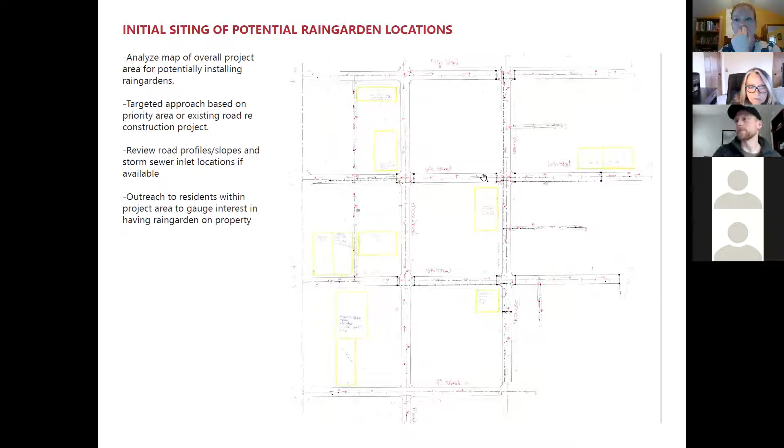Then we take a similar area, looking at contour information as well, on the broad scale, just to get an idea of the land patterns and where the current drainage is. Because if there's collection areas that already exist, that's going to be our best opportunity to start looking at implementing projects to capture and treat stormwater runoff.

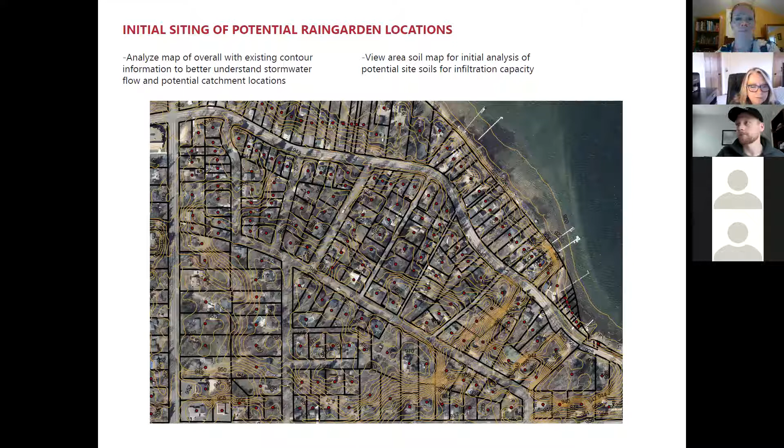This also applies on a smaller scale, down to an individual property. This is just an example of a church property that we were looking at in Roseville, and we go through the same process, but on a property scale.

We look at this map, looking at the different surfaces, whether that's parking lot, roofs, lawn, and get an idea just from a desktop analysis. We start to get an idea quickly on where potential things could be implemented, like a rain garden to capture roof runoff, or somewhere we can grab runoff from the parking lot before it gets to the storm sewer.

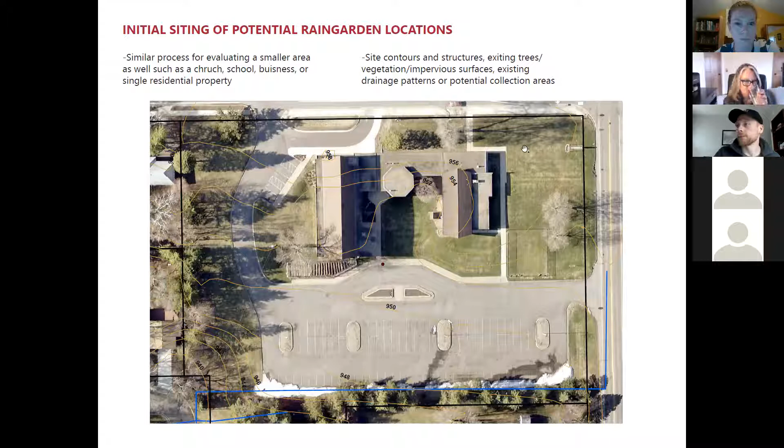Then we take those ideas and set up site visits with the landowners to do an on-site verification of what we analyzed from just aerial imagery.

One step in this is looking at utilities, so calling in a utility locate is obviously important before anyone starts digging a rain garden. Then on site, we look at things we saw, like roof drainage or storm sewer inlet locations that we had maps of, verifying those on site.

Like the picture on the top right, looking at this park area, you can see the catch basin in the corner of the parking lot for the storm sewer. All the water from the parking lot is already going there, so if we can implement something just upstream from that, that's probably a good place to pull water off and create a rain garden in the grassy area.

Similarly, if there are any areas, like the bottom left picture, a marshy area next to a driveway where the water runs off and collects, just looking at those opportunities on site, you can start to pick out these spots that are already conducive to potentially creating a project there.

So just looking at current runoff patterns, things like where the impervious surfaces are, downspout locations is a good thing to look at, where roof drainage is coming off of roofs. And then checking for any other potential conflicts or obstructions like trees, or the park had a picnic area there, so we need to make sure we leave room for that.

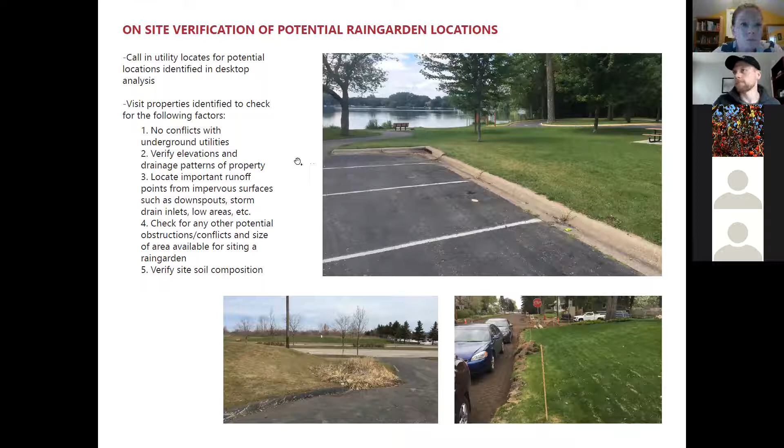From there, we've picked out some good spots on a property that might be good for rain gardens. Then we've got to start looking at the watershed and what all drains to that spot.

In this example, there's a rain garden down in the left-hand corner up by the street, looking to create a curb cut rain garden, as we call them, to treat runoff from the road and surrounding areas. So we pull out the different land uses and impervious surfaces versus lawns and trees, areas that have some permeability to them.

We use that data to create a watershed and calculate how much runoff would come to that rain garden, so we can properly size it. I usually use GIS software to do this, because it can easily map these out and calculate areas, so that works well. But particularly on a smaller scale, you can even do it on site yourself, measuring out the different areas that flow to a certain rain garden.

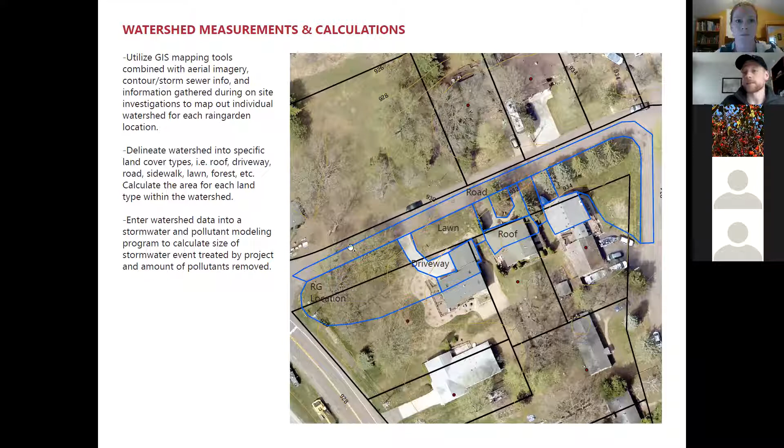And then the next step is to take that information and model it. For our process, we use different modeling software. Back in my school days, we learned how to do this by hand with equations, but the nice thing now is there are programs that run all those calculations for us. The two most common ones professionals use are MIDS and WinSLAMM. I use WinSLAMM mostly myself.

So that's just an example I'm showing here, with all these data entry points. On the bottom left, you enter in your acreage of roofs, parking lots, and sidewalks, and the program calculates how much water runs off for different rain events, how much sediment runs off that amount of roof, things like that.

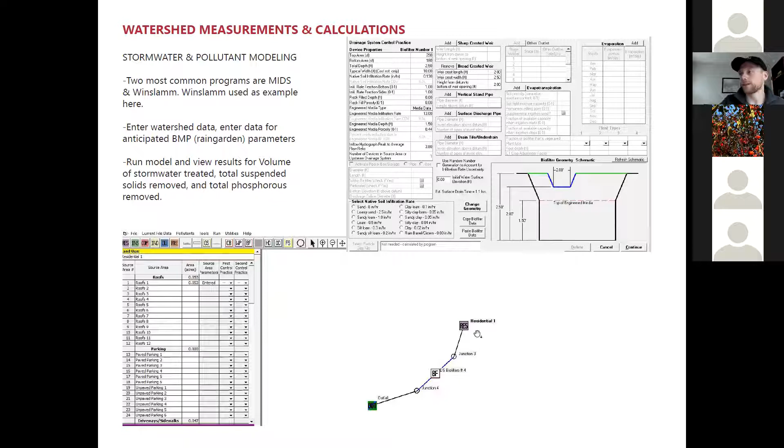And on the top right, you enter the data for what your potential rain garden could be. Based on the site area, how much space you have for the rain garden, you might enter that you're going to do a 300 square foot rain garden with 6 inches of ponding, things like that. You enter it all in, a little diagram shows it connecting together, and you hit run.

The nice part is it runs the pollutant calculations for you. The big three we model for are volume—we're looking at reducing volume, particularly in urban areas where there are flooding issues. So that's a big part of water treatment for us, infiltrating into the ground so it doesn't run off and overload our systems, lakes, and streams.

Then we look at the total suspended solids in the water—that's your sand, sediments, and things that float and wash out. And phosphorus is the other big one we look at. That's a really important pollutant to look at.

So this kicks out how much is going to run off once we implement the rain garden that we designed. The really nice part about WinSLAMM too is it pulls actual historical rainfall data, so you can look per storm and see if you're getting a full inch of rainfall treated, or maybe only treating a half inch. It's really useful data to back up the benefits of these projects and show that.

And the important part for us too is making sure the rain garden we're going to put in can sufficiently handle the watershed and not be overwhelmed when it rains.

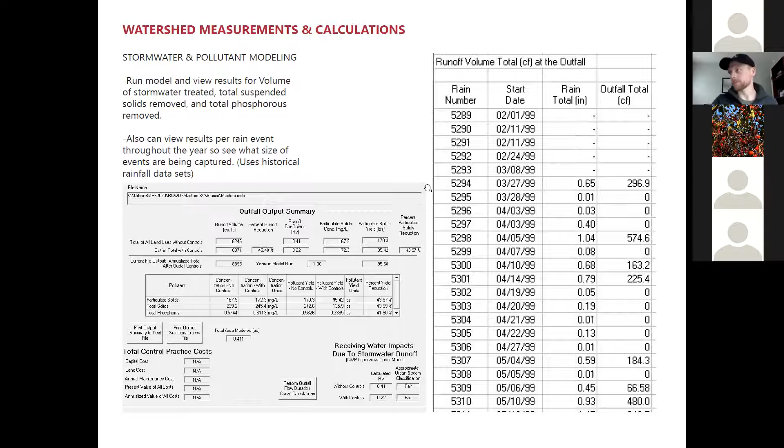So that's all the intro stuff. Then we take that information and finalize designs for these. Generally this is a back and forth with landowners as part of the process, because they have certain design requests and things they want to see, so we make sure to include them throughout.

I like to start with a quick concept with them—just a really quick and dirty plan showing size and rough layout of a project. Then we take that into construction designs and material estimates, things that can be used to actually bid and install the projects. That includes size, shape, different features of the rain garden, drawings of how it all gets put together, and planting plans are obviously an important step in that.

So this is an example of that first concept plan that I'll draft for people—just diagrammy, shows where the water is coming from and where the rain garden would be, with a rough size based on those calculations I just ran. I'll throw on ballpark cost estimates too, just to give landowners a rough idea of what they might expect to pay and how much they could potentially get awarded in a grant for that project.

It's a nice jumping off point, particularly for people with more than one opportunity for a rain garden on their property. They can see which ones have the best bang for their buck, and based on their budget, decide if they can do all of them or want to focus on one really important one and move forward in the design process. This step can be done quickly, and it really helps them decide for sure how they want to move forward with the project.

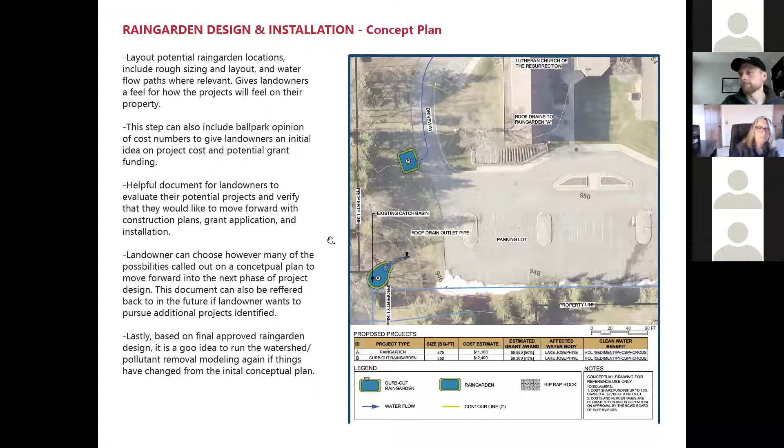And then from there, I take the projects that I decide to move forward with and draw up construction designs. So this is just a sample of a curb cut rain garden I drew up for a landowner in White Bear Lake a few years ago.

So working with the landowner in this process, they can review these as I get them put together and make sure their aesthetic designs and things are inputted into this, as well as the important technical information I have as far as size we need to make it and making sure it's going to be treated right and not have erosion concerns.

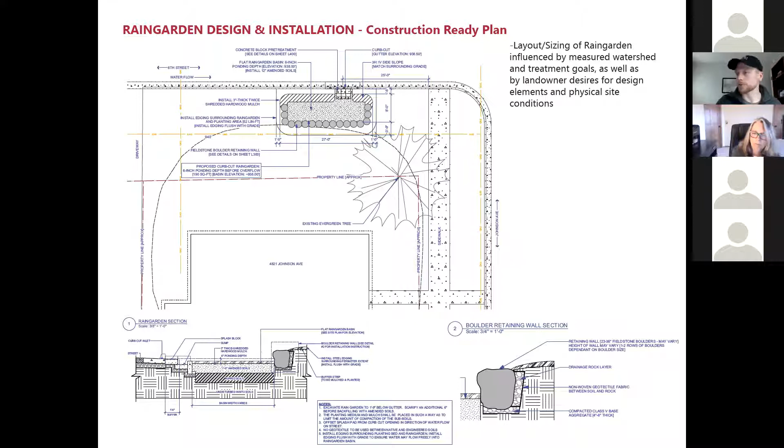So that's kind of the process, and then that gets bidded and installed. But I just wanted to touch briefly also on the different elements that are really common that I'll include in rain gardens. The big one, really important one, is pre-treatment structures.

Most rain gardens we design have one or two specific spots where water enters the rain garden. So we look at getting something at that spot that helps slow the water as it enters to limit any erosion concerns, and also capture some of that sediment and debris, leaves and sticks and sand from the roads, in one area that's easy to clean out, so that stuff doesn't wash into your rain garden and plug it up over time.

The water flows in, steps down, pools there and settles a little bit before it flows into the rain garden. This one's nice - it's really easy for contractors to install, pretty affordable, and does a really great job.

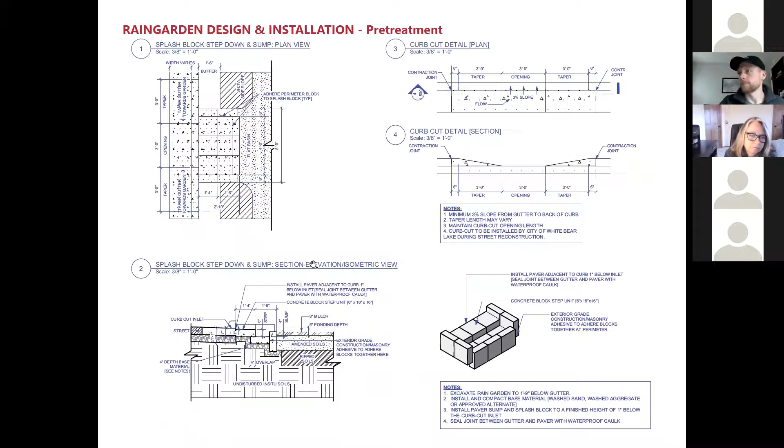Part of these inlets, like I mentioned before, a lot of times it makes sense to include those pretreatment structures to capture extra sediments.

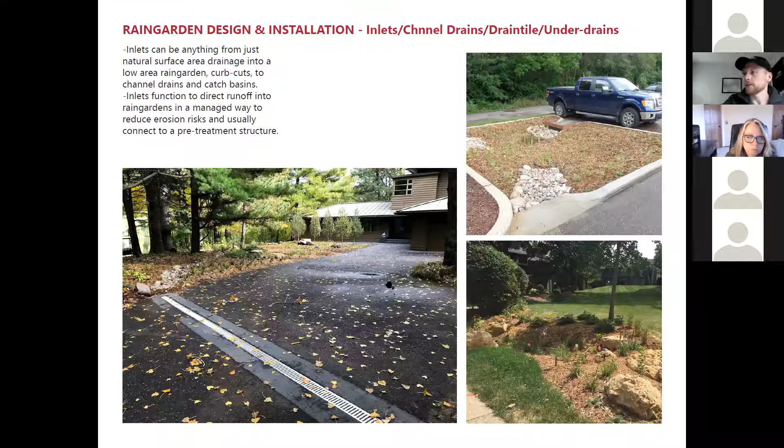These under drains essentially will take a rain garden, which is an infiltration project where the water is soaking into the ground and staying there, and turn it into a filtration project. The water filters through the soil, but then goes into the drain tile and back into the storm sewer. So there's still some benefits and pollutant reductions, but it allows the rain garden to drain faster.

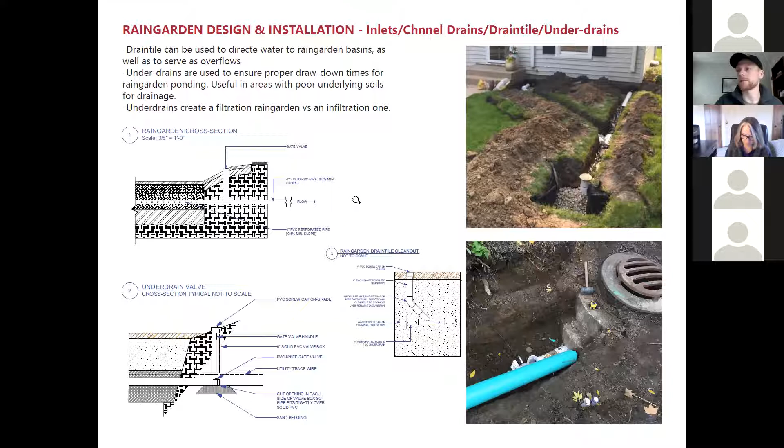When we can, we try not to have flow-through systems like that, just due to the flow path concerns. Ideally, what we'd like to have are what we call offline systems, where the water enters a point, fills up the rain garden to the level of that inlet, and then the rest of the water continues down away from the rain garden.

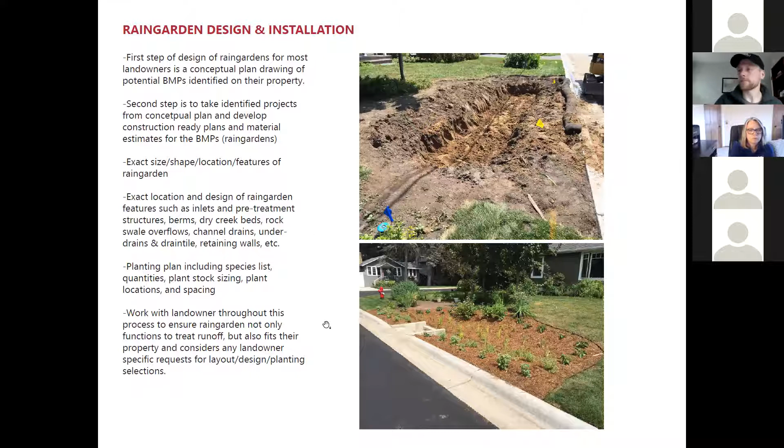Curb cut rain gardens are a great example of that. Let me scroll up to a picture here to show you. This bottom right picture is a curb cut rain garden. The water flows down the street, goes into the rain garden, but rather than flowing out of a different area of the rain garden, once it fills up with water, the water will just continue down the curb line. That's what we call an offline system, which is ideally what we'd like to see, but that doesn't always work.

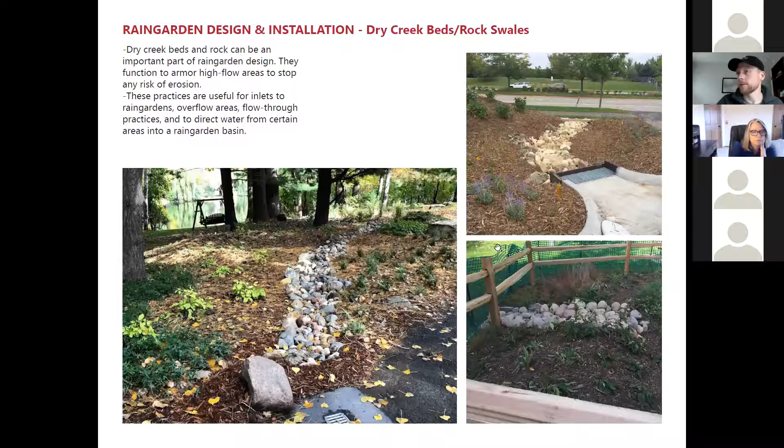Another part of rain gardens that's really common is creating berms and weir structures. The weir structures are similar to rock swales, directing overflows or inlet flows, creating a spot to capture sediment, and armoring those spots where water is concentrated and flowing through your rain garden. Usually that's part of a berm system where we're creating that ponding area with a berm.

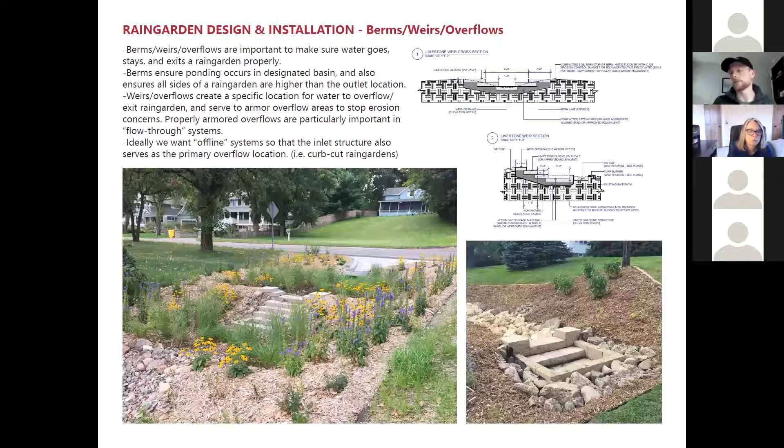Berms also are great to create those offline systems. Sometimes you'll need a berm along one side where the area is lower, and you want to make sure the water goes the opposite direction. It's general grading, making sure rain gardens fill up in the area you want and overflow in the direction you want. When they do overflow, things like weirs and rock swales create that overflow in a controlled manner.

The last main part, when designing these projects, is a native planting plan. The plants add great function in a lot of different facets for the rain garden. First and foremost, they have huge root structures and large plant masses, so they don't allow erosion to happen, and those root structures soak up water and help break up the soil to infiltrate water into the ground.

The bonus features of native plants are they look amazing, they're beautiful, and they grow really well in these rain garden conditions. There's a ton of great natives that love to be wet for a while and then dry out for a while, repeating that cycle. And as you all know, natives obviously have great pollinator and habitat benefits.

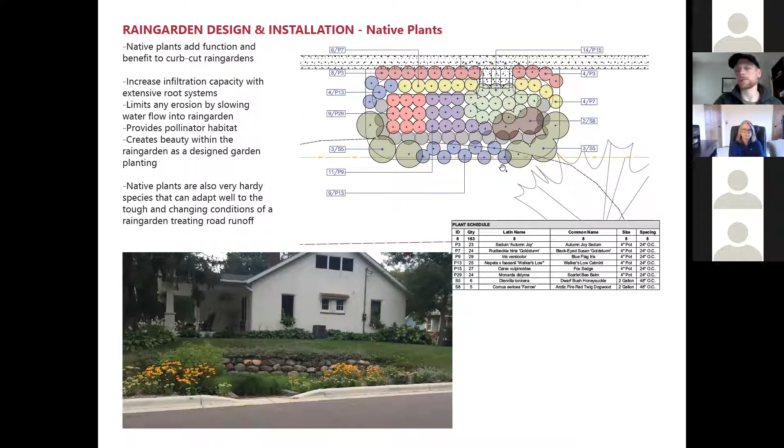So we always try to include a great mix of natives. We use a lot of perennials mostly, including some shrubs where it makes sense, and occasionally some trees if there's an area that makes sense, especially if the landowner wants some canopy conditions. We workshop this with landowners as we put the plan together, so if they've got colors or particular plants they love, we try to include them as long as it'll survive the conditions.

That's something that makes the rain gardens a beautiful addition to someone's landscape. It's an important factor for someone wanting to manage and love this project in the long term.

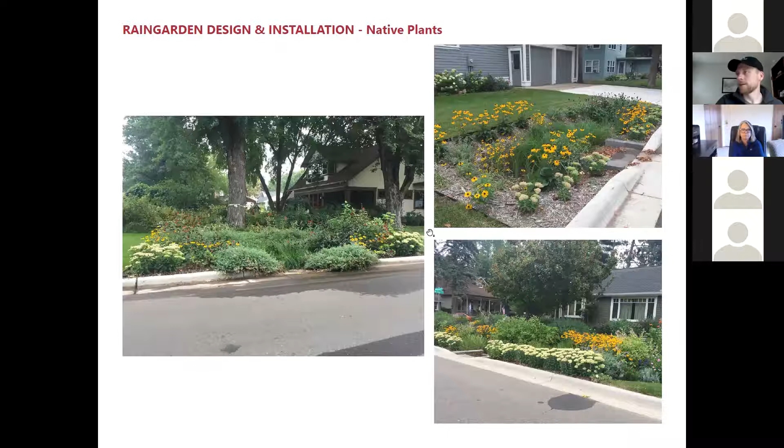Once it's all drawn up, the last step for me is to put together a list of materials needed to build the project - soils being brought in, plant numbers and sizes, mulch amounts, any concrete or rock work needed - so the landowner can package this with the plans and get bids for that contract from contractors to install it. A fairly easy process for them.

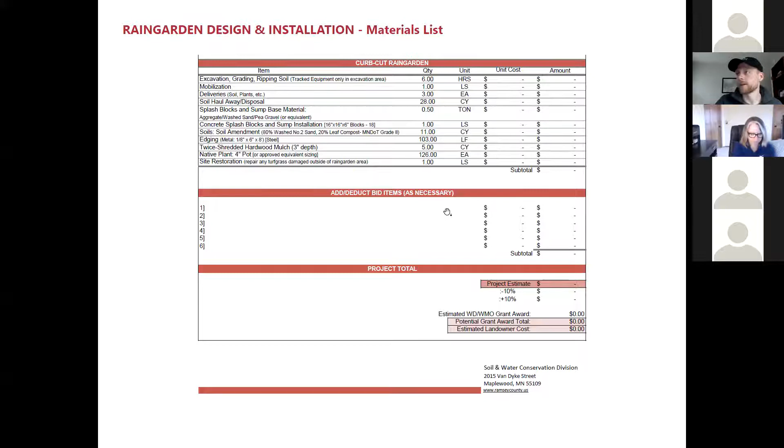Once they have those documents, I put them in touch with contractors sometimes as well to get those bids for installation. Most cost share programs in the area require 2 bids minimum to install, so we have those final prices and can use those numbers to submit the application for funding.

Once our cost share is approved, we get to the process of getting them in the ground, which is the most exciting part, I'd say.

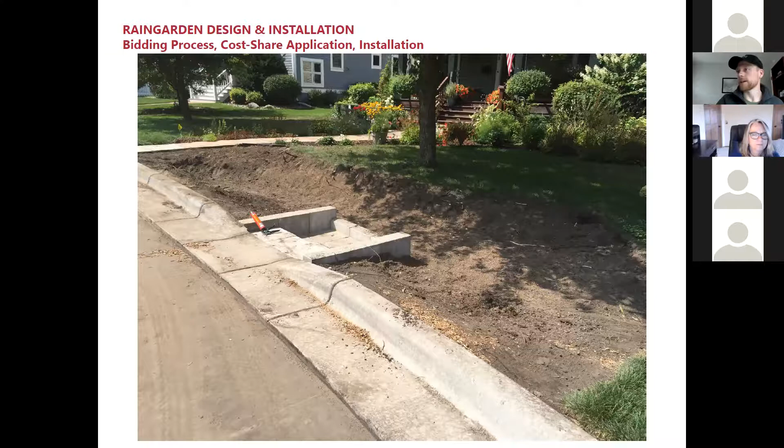So that's kind of my process for rain gardens and the really important things that we include and design into them.

And just kind of things to consider as you look at projects in the future. Yeah, I guess that's all I have. So if there are questions, I can answer any questions.

I think the exciting thing is, as we get ready to see if people have questions, is that a lot of the same things, particularly early on, that Brian does when installing some of these larger rain gardens, as water stewards you can also look at the topography of the area, look where the storm drains are, know your neighbors or people who might be open to something like this, start to see on the landscape where a good location might be, and then work with your stakeholders and partners to implement some of these projects.

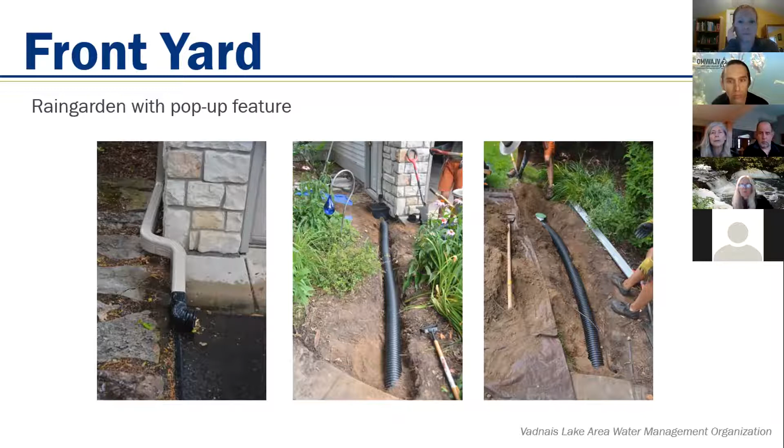The person we consulted with came up with the idea of running the drain into a French drain and then under our sidewalk. This is a picture of it coming from the French drain, into the earth, and then under the sidewalk. That was the original problem, with all the water coming from that downspout and going directly out to the street and then immediately into a drain.

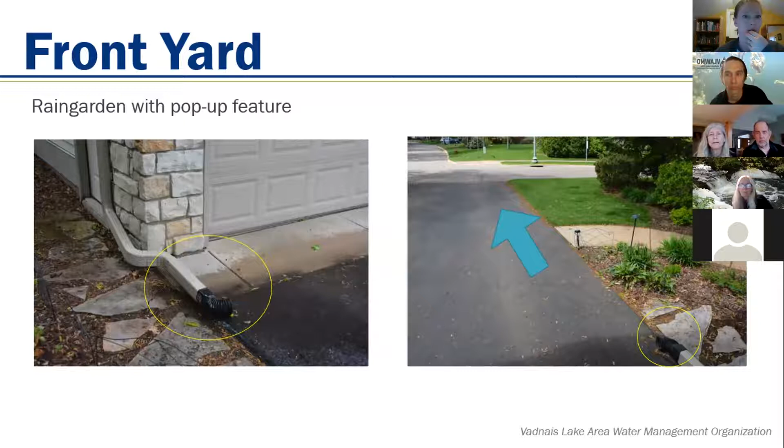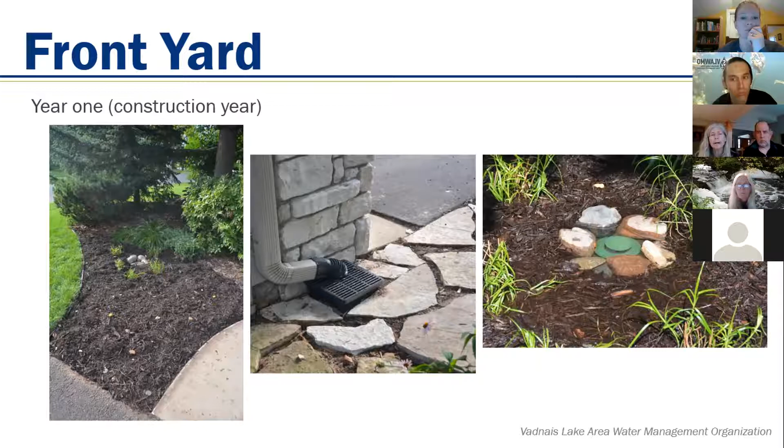And then we planted native plants in the area. That's a year after, with all the plants up and blooming. We were a little concerned because this is a lower area around the pop-up, and we worried about how fast the water would filter into the soil, so we did a test there. We have clay soil, but we were shocked that it filters quickly down into the soil. We've had no problem with it whatsoever, even in heavy rains. This took off almost 450 gallons of water that flowed from our roof.

Okay, so this is on the south side of our house. This is one of the erosion projects. One thing that's very significant is that most of the erosion was on our neighbor's lawn, but we contributed significantly to it from the drainage off our roof. So we got permission from the neighbor to work with them to improve the drainage. Their lawn was all pitted and was just a mess. So the landscaper suggested we make a bigger swale, and they came in and dug a wider, bigger swale that went down the hill, and planted Pennsylvania sedge.

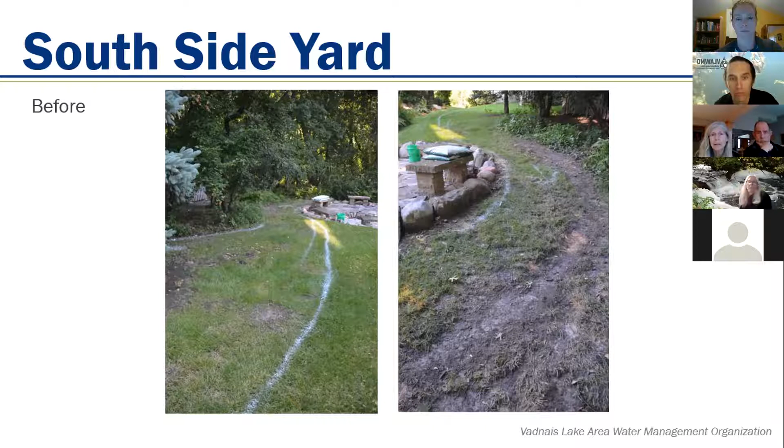So this is what it looks like immediately after they planted the Pennsylvania sedge. This goes not only down the hill, but down and around a large part of the neighbor's yard to collect a lot of the runoff. One thing I didn't mention is that behind our house we have woods, but a little bit beyond that is a wetland. So anything flowing down behind our house and down the hillside is flowing into the wetland, so we really needed to slow that down and get a better setup for that.

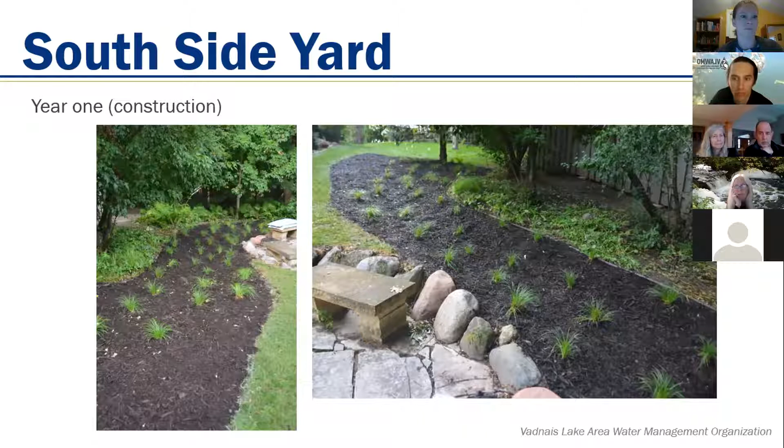I would say that this year — do you have another picture of that, Nick? No, I don't. This year it's amazing how much the sedge has spread, and it is really holding the soil very nicely along the swale. That took care of over 600 gallons of water coming from the two roofs.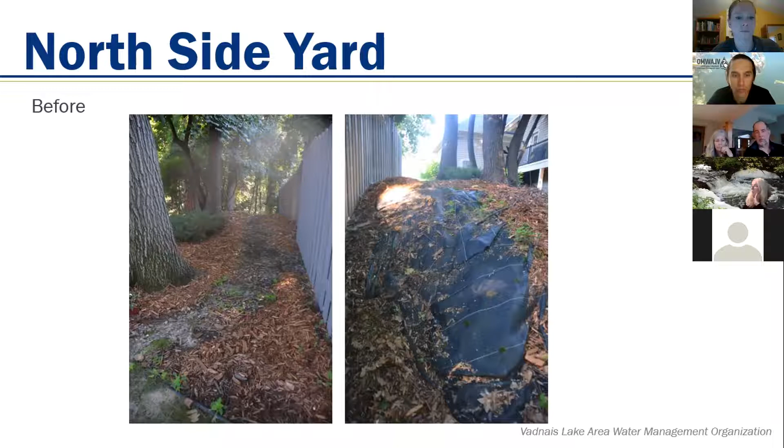So the solution was to come in and put in a swale, lay down the ground cloth to prevent erosion, and then build a dry creek. The dry creek not only went down the hill and over the hill, but we also added a small one that came directly from our drain pipe, which you can see on the right side. That small rock creek then emptied into the larger one in the middle section. Along the side we also planted native plants, which have been blooming nicely and have really stopped the erosion.

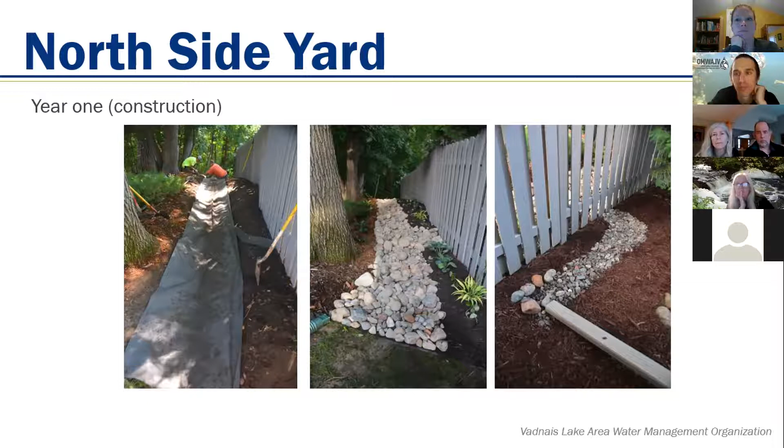Actually, we had very good cooperation from both neighbors on both sides, because as we mentioned earlier, a lot of the water runoff came from their roofs as well as ours. They were both extremely cooperative and helpful in getting these projects done, and really happy to do it.

This is a picture of a garden tour that we organized for people living in the Vadnais Lake Area Water Management Organization to go around and see. We had about 6 different sites for people to see best management practices, everything from permeable driveway to several rain gardens. Some came to our house where they saw the dry creek beds and the sedge planting.

This was part of our capstone, and we funded the North and South project that you saw, and the garden tour, with the Community Blue Grant. The Community Blue Grants always have an education community component, and so this is the garden tour.

We rented a van and drove people around from site to site.

Last year, as you know, people were not climbing in vans together due to the pandemic, but we did go ahead and do another garden tour because people really appreciated getting to see other people's practices that they've put into place.

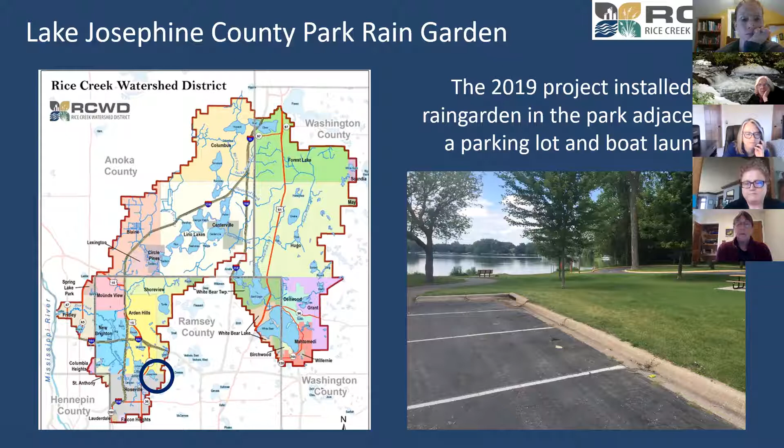In October of 2019, construction began. You can see a curb cut was made, and the pre-treatment structure, the big catch basin, was installed, which has two pipes coming into this area.

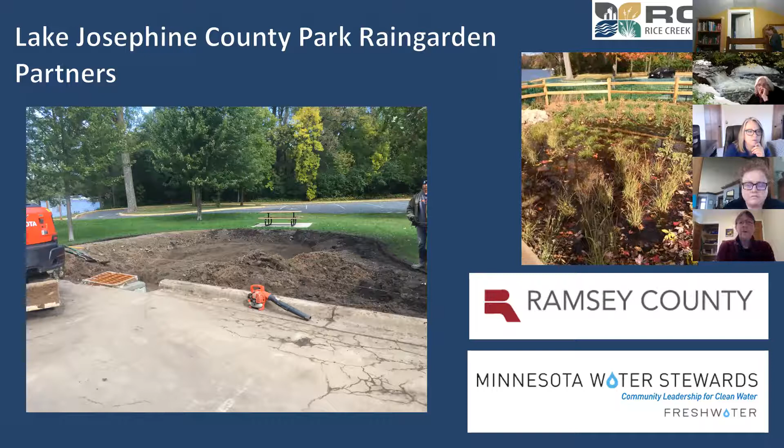The center of the garden is full of rocks. The two tube drains feed right into that catch basin. And the garden has about 530 plants, though I forget the exact number of different types.

The water goes through the catch basin and into the rocks, where it's filtered, and there's an overflow on the far side with more rocks to handle it if it gets too full. It was somewhere between 15 and 19 different species of plants, and they're all native plants.

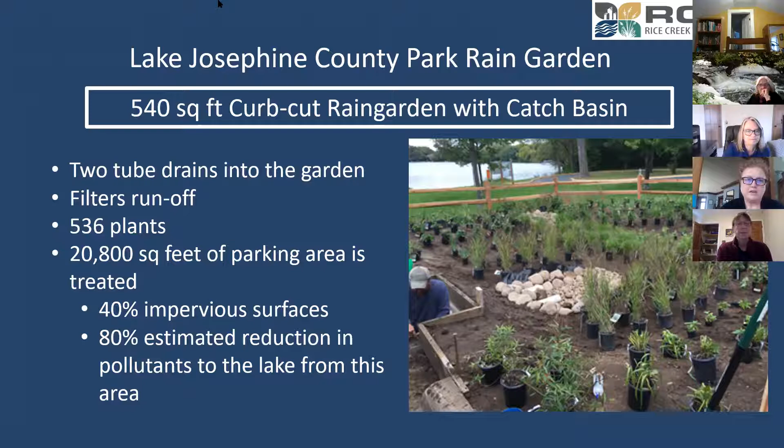Part of the project is that Claire and I are doing maintenance. We committed to maintaining the rain garden itself, and to assist with training county staff who would then take over maintenance, as well as other outreach projects.

They added a fence to keep people from just walking through, though there's no gate, so there's a way to enter the garden. A green fence was put up for the first winter, and that's down now, so it looks a lot nicer. It's been up for two winters now.

As part of this, we've committed to public outreach. We planned last summer to have a rain garden open house at the site, where we'd answer questions and talk to neighbors and interested residents about the benefits of the rain garden, how it works, and dispel some misconceptions. We also reached out to the Lake Association, which intended to publish information to help neighbors understand why it's important and what they could do in their own yard to prevent stormwater runoff and chemicals flowing into the lake.

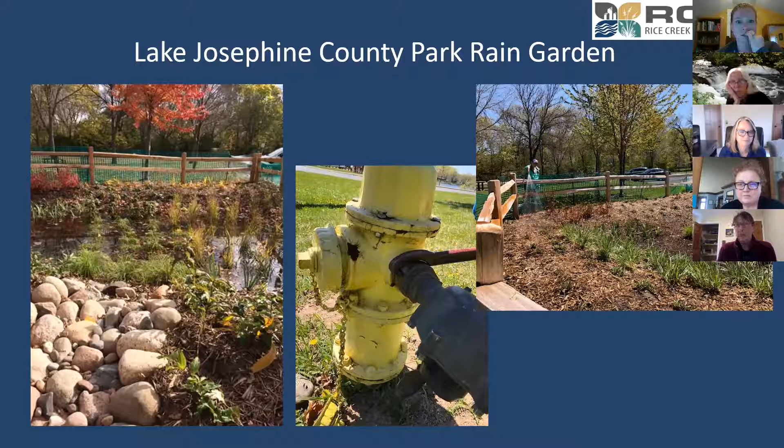So we're yet to see what's going to happen this year. We haven't done the real cleanup yet, and there's a lot of leaf debris in the garden. So in a couple of weeks, we're set up to go clean up and see what happens. The first year, most of the plants came back. There was some Joe Pye weed and some other Monarda that didn't make it, but most of the plants came through the first winter just fine. So we'll see what happens with this one.

Some of the things on our wish list for this rain garden — it would be great if you guys took a drive through there and checked it out — is to collaborate with Metro Blooms on a rain garden maintenance class, which could also be something we'd consider doing as a public event. We're eventually going to have to train the Ramsey County group on how to maintain and clean this, so that's something we can work with Metro Blooms on.

We'd like to put some signs on the garden so people understand what they're looking at — why is this here, what's it doing, how is it important. And then maybe those little QR codes you see on signs, like menus everywhere have now — you take a picture with your cell phone and it pops up an internet site with information. We'd like to do that, hooking into a website at Rice Creek Watershed District that would identify the plants you're looking at and give a lot of info someone interested could look at on their own.

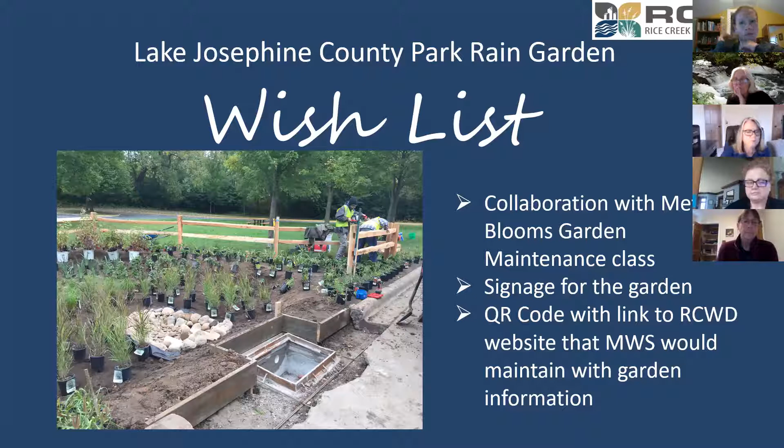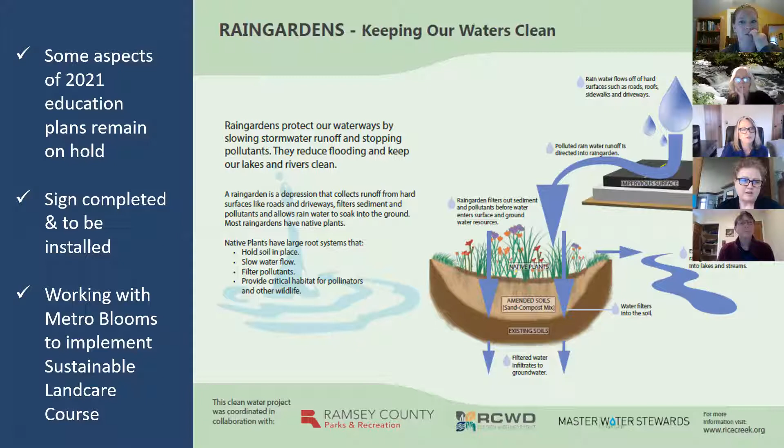So like we mentioned, some of this is on hold and so forth. This appears to be the sign, Beth, that we're getting, right? You're on mute. Oh — she disappeared. That was a fail. I got so excited.

Yes, the signs were delivered late in the fall.

I'm just gonna leave it at this. Can you guys see it right here? Yes, what are you seeing? Are you seeing the sign? No, I apologize.

Do you know when it's going to be installed? It's going to be installed as soon as my Green Corps member, Ben Rowland, who's on this call, can help me get out there and do it. There were some staff shortages at both Rice Creek and at the Conservation District last fall when they arrived, so we said we would install them in the springtime. So we are going to do that — I'm hoping within the next few weeks, but definitely sometime in May.

Cool, and that's exciting. And Brian Olsen, who did the presentation earlier, was key in developing the signs, just starting them. We're also already working with Metro Blooms to get their sustainable land care class scheduled as well, so we're hoping to see that happen.